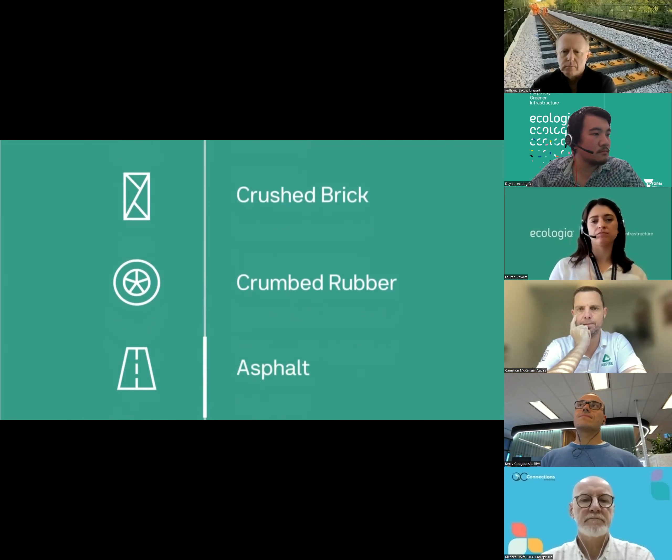The future of Victorian infrastructure is green. Recycling Victoria has laid out a 10-year roadmap to a circular economy, a future where our state's public and private sectors will unite to prioritise sustainability. At the core of this are our public assets, the roads and railroads that connect us and ignite possibilities. But where does the change to green thinking begin? The Recycled First policy. Recycled First will require transport infrastructure projects to optimise the use of Victorian recycled and reused materials. This will see the use of recycled aggregates, glass, plastic, timber, steel, ballast, crushed brick, crumb rubber and reclaimed asphalt pavement take precedence over virgin materials. For information, technical advice and support on bringing your sustainable project innovations to life, drop ecologiQ a line. Recycled First, supporting purposely greener infrastructure.

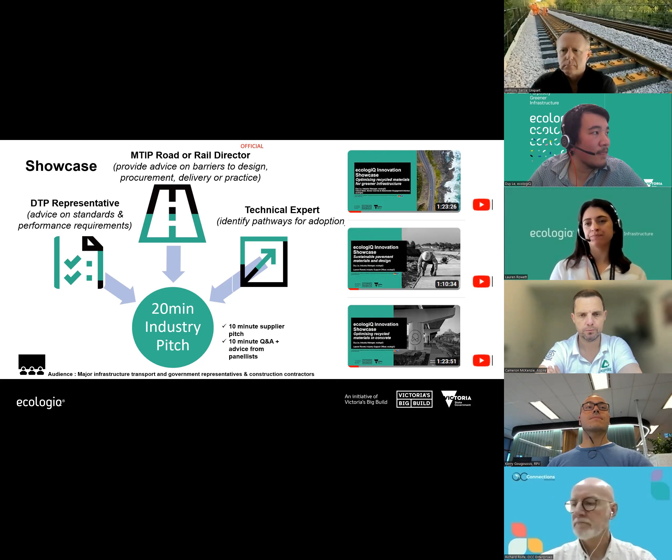So now for our panel for this round, I would ask our panelists to turn their cameras on. I'd like to introduce you first to Kerry Gougoussis, Manager Innovation Continuous Improvement, Rail Projects Victoria, our rail expert for this event. Kerry, do you want to say hello? Thanks, Doy, and happy Friday, everyone.

I'm excited to be here and see what's new on the market and how we can optimize the use of recycled materials on our rail projects. So thanks for the warm welcome, Doy.

Well, thank you, Kerry. Next, Yew Chin Koay, Structural Engineering Advisor at Major Road Projects Victoria. Hi, everyone. My name is Yew Chin Koay, Structural Engineering Advisor, and good to be here and good to listen from the industry, what they are doing for the recycled material.

Fantastic. Thanks, Yew Chin. And Irina. Hi, everyone. I'm also welcoming any new innovations and products, and look forward to hearing today from the panelists. Our role and engineering team at MRPV is really supporting and providing technical support to ecologiQ and the MRPV program in implementing this recycled first policy.

So we definitely are interested in removing any barriers, such as standards and specifications that are currently preventing either recycled products or new products from being used. And we very actively work on creating new specifications and preparing the changes that are necessary to be done.

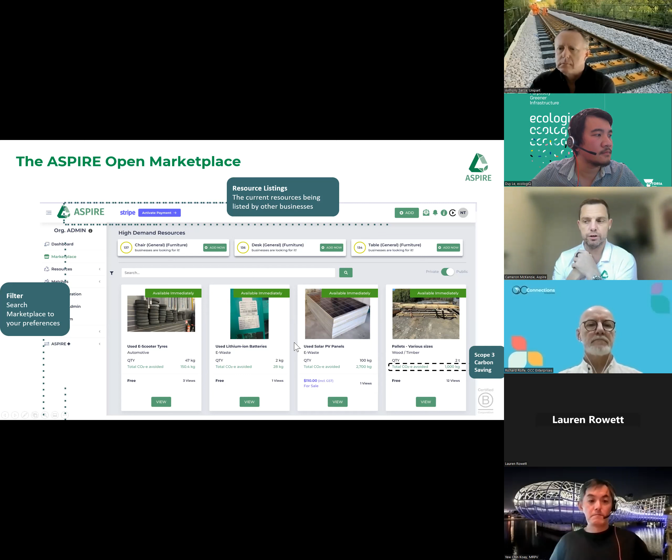So we've got them at the top, businesses or organisations that are actually looking for resources, interested in bringing it into their supply chain. And down the bottom are resources that people want to list or get rid of. The algorithm inside is not passive - it actually alerts these businesses that there's an opportunity there for them to look at.

So basically this is just a quick overview. We'll share these slides later - I'll ask Julie to do this, please. But basically what we've got here is just some high-level customizable reporting that we have. So within your network, as we just spoke about, they've got about 450 businesses in their value chain or in their network.

And basically here, what this does is it identifies the market opportunity. I was actually speaking to Infrastructure Australia yesterday about this and some of the reporting we do, and they were quite interested because they've got a lot of data and a lot of information. They know where the opportunities are, but they've got no real way to create a market around the supply and demand, where we're hoping to be working with them to do that.

And down the bottom, you can see there that we try to balance out or identify where the gaps in the markets are. So when you might have hundreds of tons of X product with no demand on it, what we try to do is help balance that supply demand aspect of the market out.

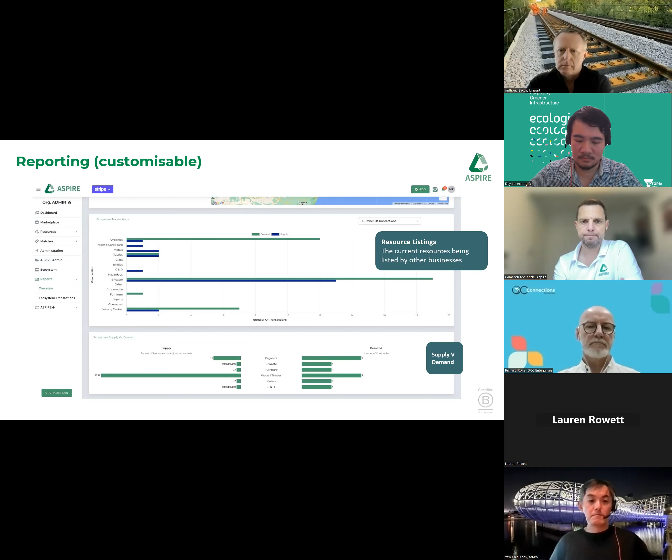One of the elements that we do at Aspire is we've got an auditing system. So as part of your ecosystem, you can go in and identify and have a look and see what the businesses are doing - again, it's very unique. And what this does is really help organisations with their actual environmental policies and goals for projects.

And what we want to do is be able to help these businesses with their sourcing, their sustainable sourcing, also listing information on the platform, so we can actually measure the impact that you're creating over the life of a project or over the life of a stage of a project.

This is just another case study I thought I'd bring in. So basically what we did is we went through this organisation - they uploaded or went through and used the platform to measure certain aspects of their business. And over, I think it was a 12-month period, it was measured over 40,000 tonnes of carbon emissions avoided, over 200,000 tonnes of resources destined for landfill, but they managed to measure and repurpose through the platform.

And for all those down there, it's over 680,000 trees equivalent of carbon reduction in the environment. So there's nothing to sneeze at - we're actually quite proud of this. But also too, this isn't just one case. We've got several organisations that do these type of numbers through the platform and really see the opportunity.

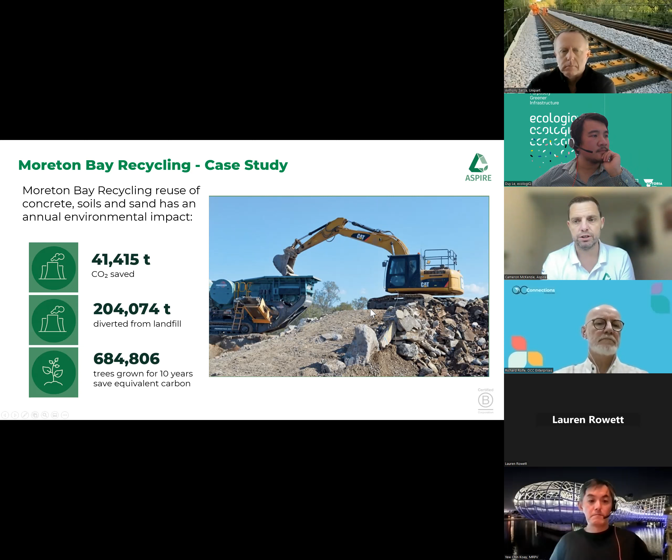We sort of touched on this earlier about the embodied carbon savings through the platform. Everything's ISO verified, but also, for those on the call, we're actually a part of Infrastructure Sustainability Council, and we're also a part of the iSupply registration.

So we've actually got, I think it's 8 credits that you can apply to some of your projects if you use Aspire, and some of them are just for trialing it or using it or trying to measure the impact of your carbon emission savings, as well as ROI and cost saving measures through using the platform. So it's almost like a no-brainer if you've got an infrastructure project going, because we can assist on that journey and with that iSupply rating.

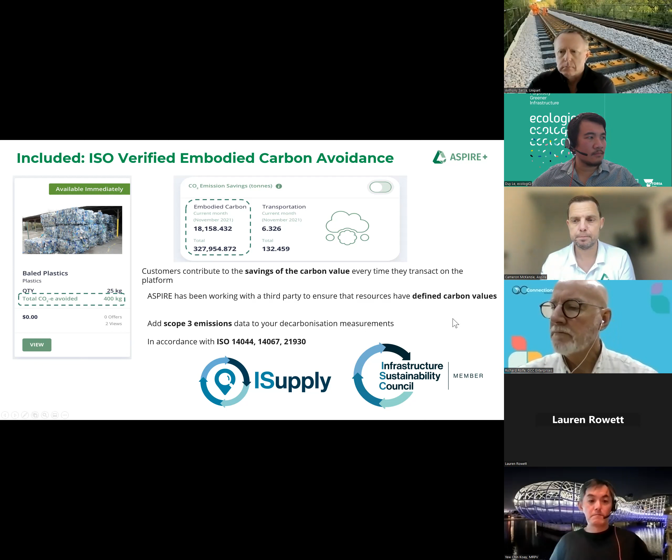Thank you, Cameron. It's great to have a presentation looking at reuse and providing a platform for that, as well as carbon accounting, which I think all of us have a role to play in on the journey towards net zero.

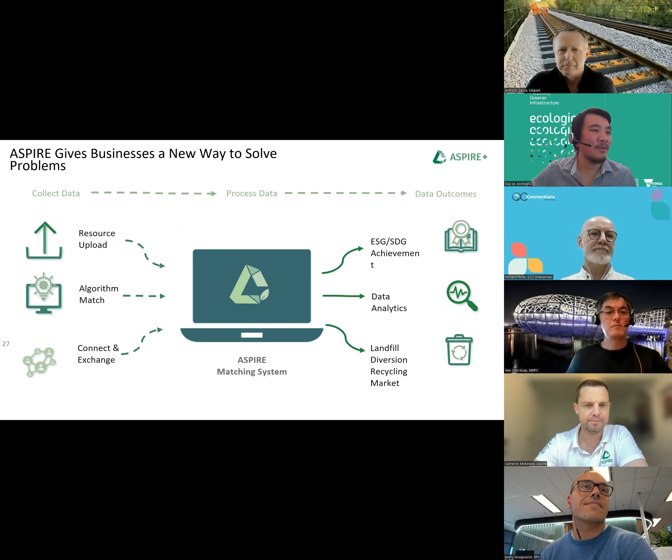Now, I think moving across to Anthony from Unipart to tell us about your composite railway sleeper. Yeah, good morning, Doy, and good morning, everybody, and thanks for the opportunity to present through ecologiQ. Much appreciated. Next slide, please. So today we're going to have a chat about the idea of using composite sleepers and bearers into the rail industry. And what do we look for in a composite sleeper or bearer that goes into that particular market?

So we're looking for something that's going to give us proven performance. We're not going to be wanting to maintain it for a very long period of time. We're looking for a consistent quality product that's going to survive the challenges of nature. We're looking at a product that's also going to be very safe in its application and also during its installation, and then also its afterlife. What do we do after it's served its useful purpose?

And part of what we're looking for, of course, is a sustainable solution. We don't want to be generating excessive waste, and we want to close that gap or close the loop on that circular economy. And what we look at is the whole life cycle cost of composites in the rail industry. Next slide, please.

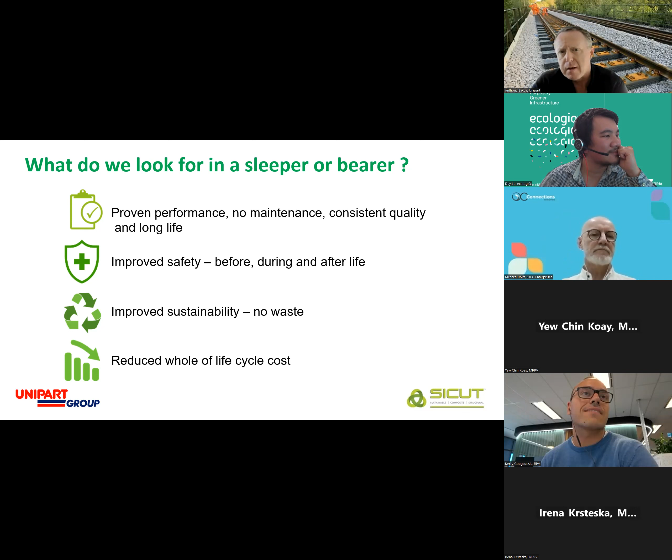So the product that we offer has some fairly unique properties in that it has the same density as hardwood timber. So it feels and handles, cuts, drills, and it's installed exactly like you would with timber. It doesn't rot, it doesn't split, warp, or degrade over time.

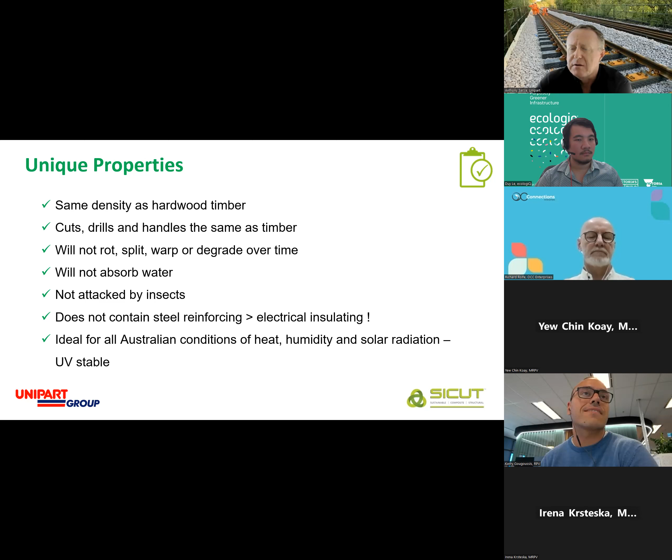It doesn't absorb any moisture. It's not attacked by any insects, and it doesn't contain any steel reinforcing, which can pose issues when it comes to electrical insulation across rails when it's used in the rail industry. And it's ideally suited for Australian conditions and extremes of heat and humidity and solar radiation in fairly northern parts of this country.

So the Sicut composite sleeper is made from 99.9% recycled feed. So we don't use any virgin material in the production of our sleepers and bearers. And it's the highest percentage that, to our knowledge, in the industry by far.

So essentially what we use, our main feed is HDPE, as I mentioned, and it's those bottles that you see in that image there. And we certainly don't use any agricultural waste. We don't use industrial waste. We don't use thin film plastics or polystyrene, no landfill material, and we don't use any plant-based fibre material inside the composite product that we produce.

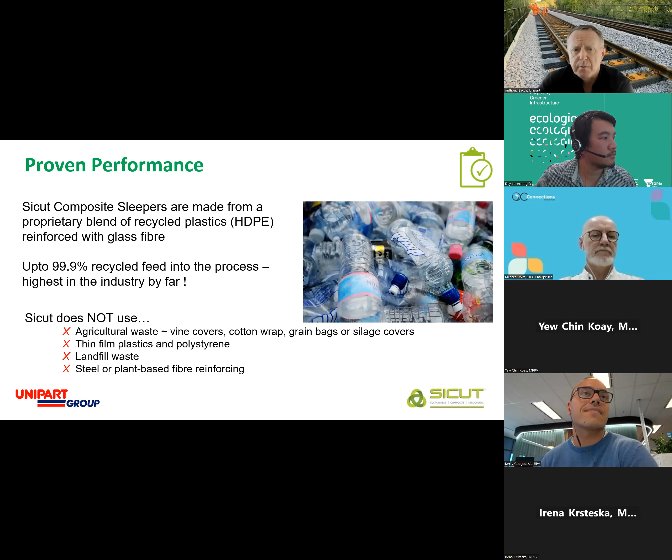It's widely used across the world in over 20 countries, predominantly North America, Europe, Middle East, and also now slowly into Australia. They're manufactured in 2 sites, UK and the US, and we are looking for 2 manufacturing sites here in Australia as well. But I'll make the fact that we do produce this on a full-scale commercial basis.

So these are not prototypes, these are not R&D exercises. To date, we've produced in excess of 300,000 railway sleepers. That's a lot of material and a lot of track and a lot of kilometres.

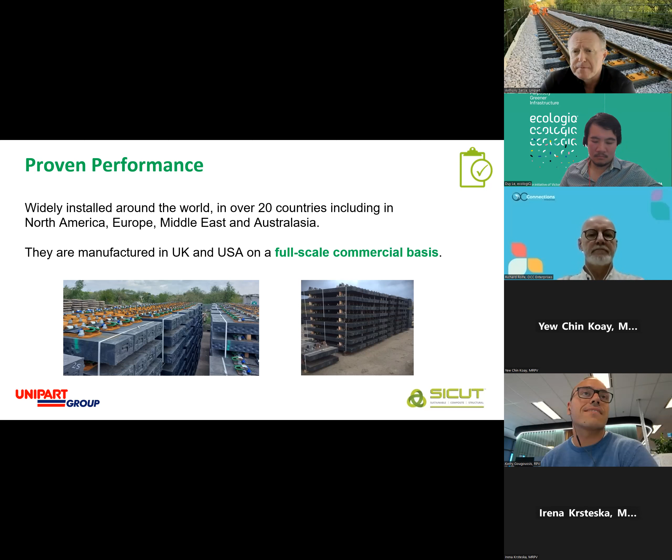So they're designed for extreme conditions and reliability and approved to the European, ISO, Australian and US standards. The standard numbers there that are listed, but the most predominant one we see in Australia is the AS 1085.22 and complies to all those standards that I've noted on the slide there.

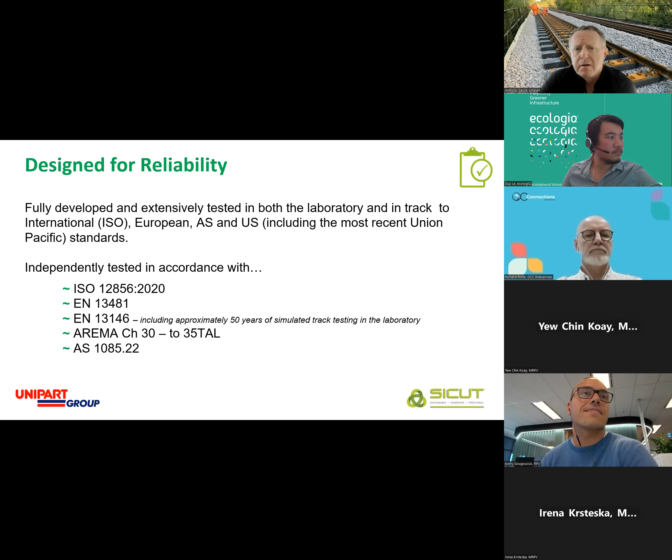We are the main supplier of choice into the European market, predominantly through Network Rail, Deutsche Bahn, and also the Swedish rail networks. They don't use any other material. They don't use concrete, they don't use timber. They use exclusively our material.

We've also been granted an interoperability certificate across the European networks, which allows us to provide the material across the entire European rail community. And it's been certified for use across the heavy haul network through Europe with a 30-tonne axle load rating for those applications.

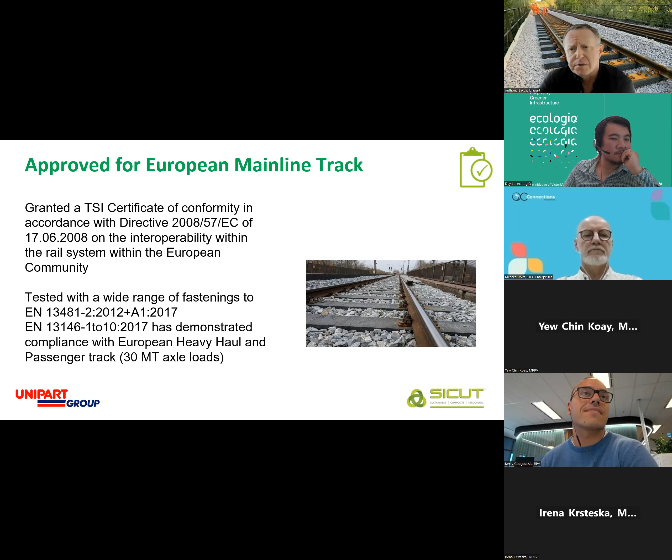Having a look a little bit closer to home, they've been installed in Australia. Probably one of our most recent one is BlueScope Steel down in Port Kembla. It's a very quick, simple installation. They use conventional tooling as they would doing a turnout refurb using conventional tools in terms of drilling, cutting and material handling of those bearers on this turnout.

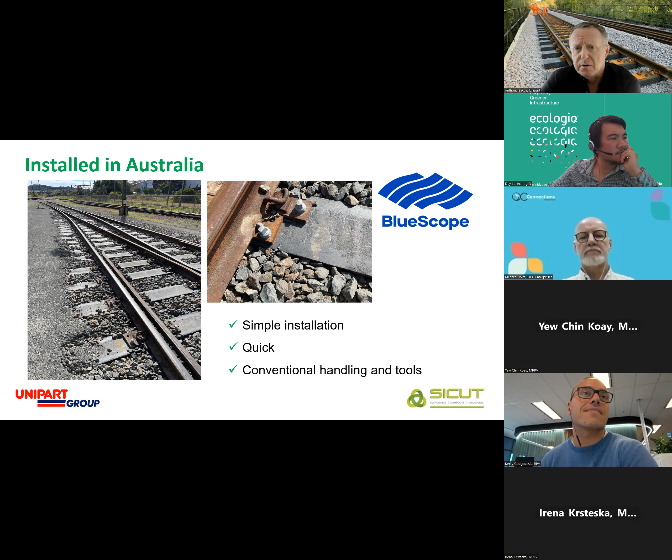We have a fairly high continual traffic load here. This is a shunting yard where they marshal up the coils of steel that have been produced, a constant 25-tonne axle load across these turnouts, replacing timber that lasts on average sort of 3 to 5 years. We're looking at a life of in excess of 50 years.

Also installed at Tasrail at a place called Western Junction outside of Launceston for the last 3 years on 3 turnouts. No degradation or breakdown whatsoever in that application.

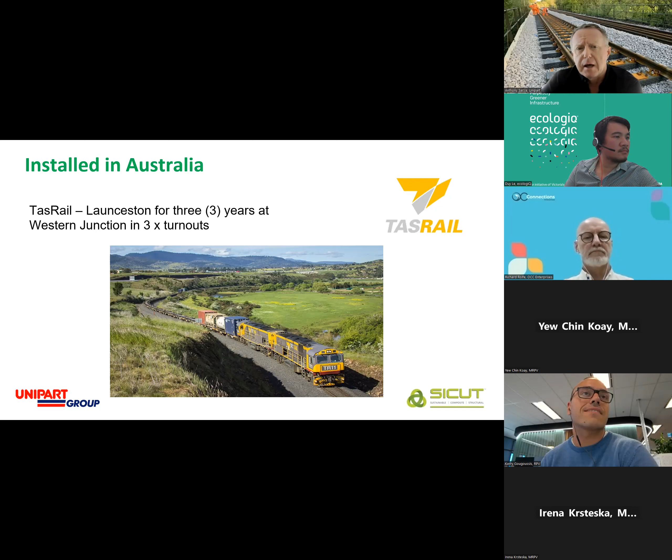Also installed at Pacific National up in Lithgow, in the Blue Mountains, on a shunting marshalling yard. Again, we've seen no degradation or breakdown in that material whatsoever.

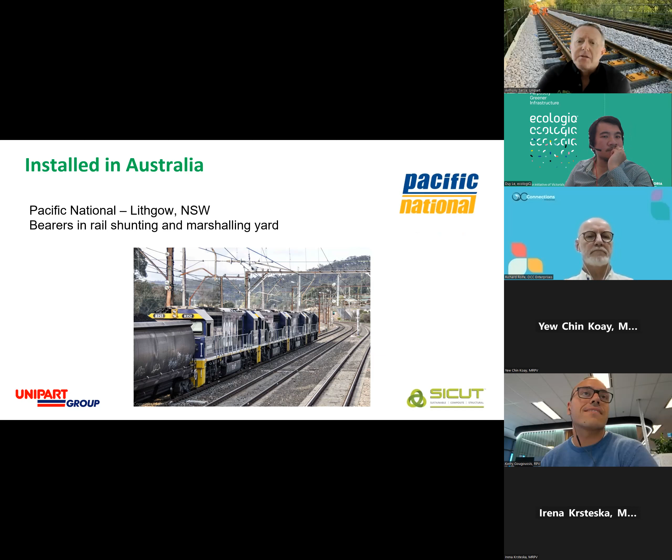We're about to go into a trial program with the PTA in Perth. We'll be installing a series of composite sleepers in comparison to timber, predominantly at Claisebrook Station, which is a suburban rail station in Perth in the metro area.

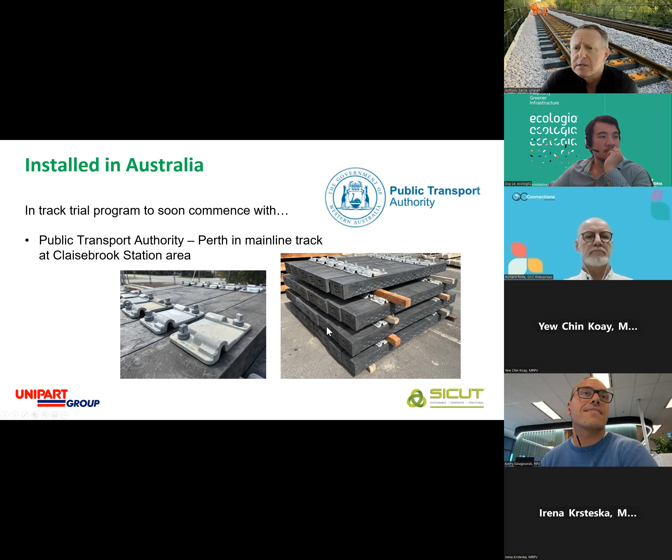And then also, again, another trial program associated with a type approval process through Queensland Rail at a location yet to be determined.

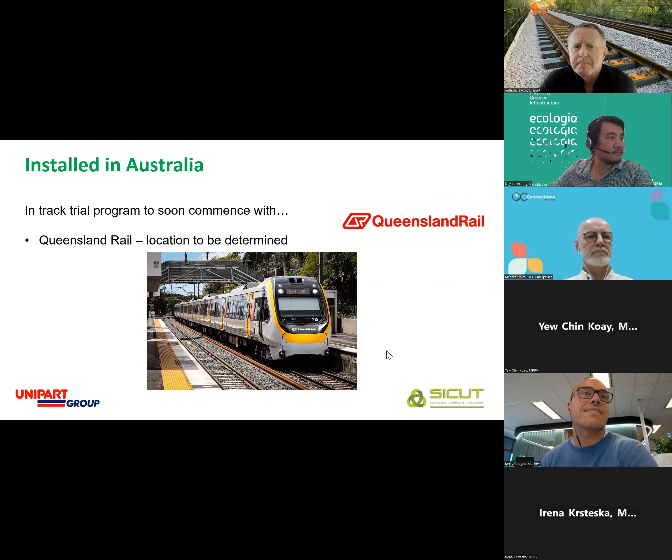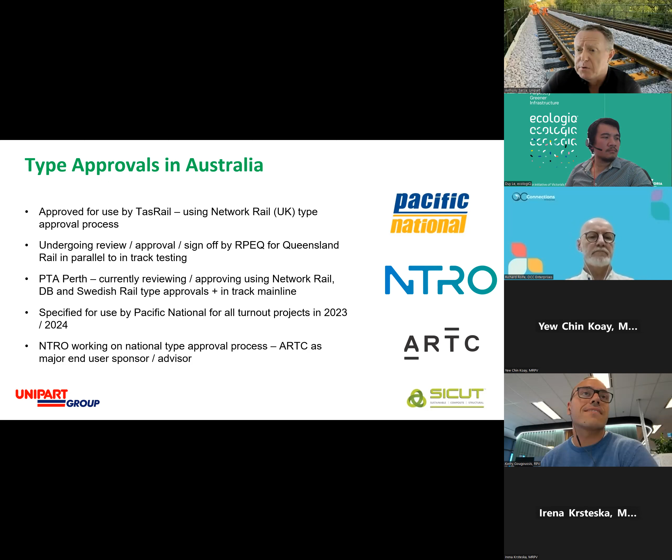For the type approval process, we're in various parallel stages across the country. We're going through a series of approvals through Tasrail, using the Network Rail type approval. We're in the process of an RPEQ sign-off for QR. The PTA in Perth is also looking at using the grandfather principles for Network Rail, Deutsche Bahn and Swedish Rail for their approvals. It's been specified for use by Pacific National, and we're also working through the NTRO for a national type approval process with ARTC as principal sponsor, moving forward in the latter part of this year and early next year.

Material handling, as I mentioned earlier, is exactly the same using mechanical and manual equipment. You can use the same sleeper and bearer handling, both mechanized and manual. No additional tooling or handling equipment is required at all.

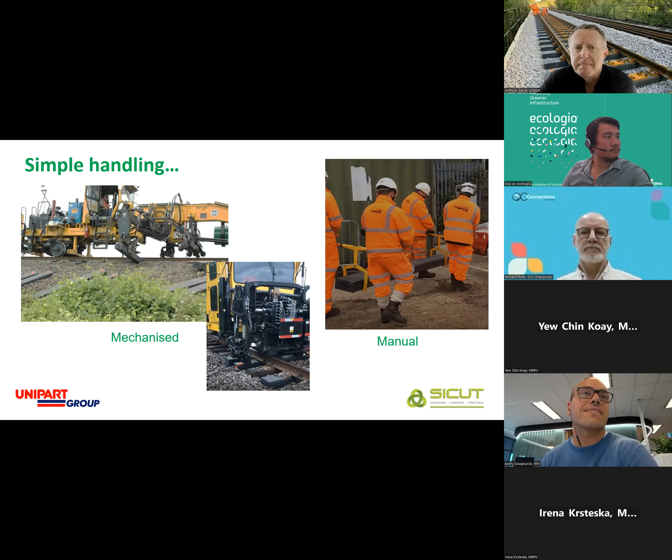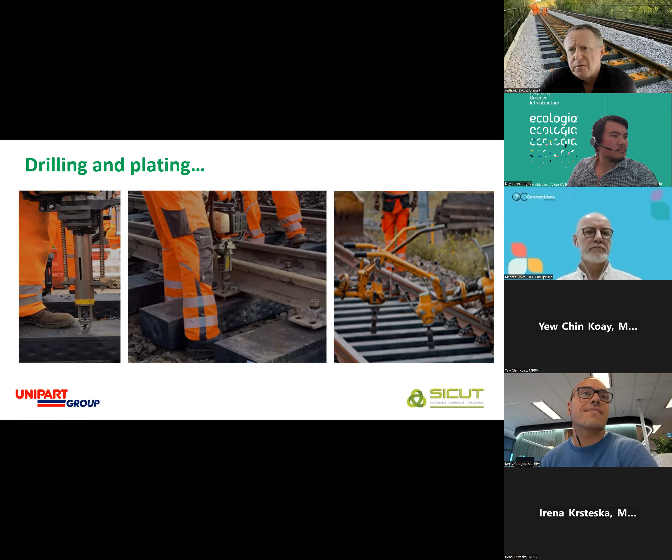It drills and plates exactly the same way as timber. You use the same drilling and cutting methodology. There are no issues or dramas with how you would handle this material.

Rail welding and grinding, again, nothing really to be cautious about. The material doesn't self-combust or catch fire. You have the same precautions as you would working with concrete or timber when working with our composite.

Our material is 100% recyclable at the end of its 50-year life. It doesn't contain any plant-based fibres and no steel reinforcing whatsoever. So there's no liability at end of life to go through a complex and costly disposal process to remove inserted materials. The ultimate plan for us is to pick it up and put it back into the front end of the process, recycling it into another composite bearer or sleeper.

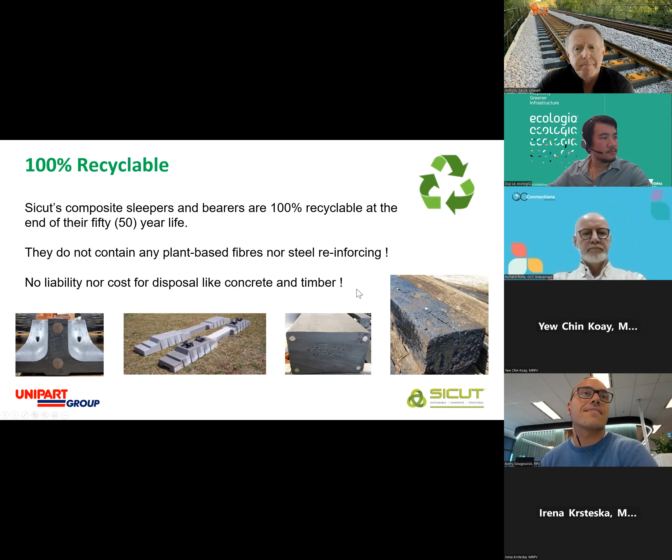It is also resistant to derailment damage or wheel drop. Quite often when you get a derailment, you'll end up having to replace all the sleepers or bearers damaged by the wheels striking them. You will indent the composite, but you will not crack it or break it as you would with concrete or timber.

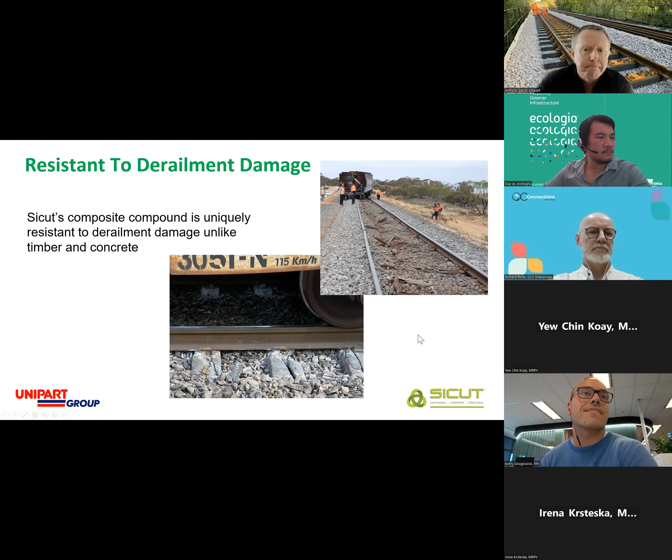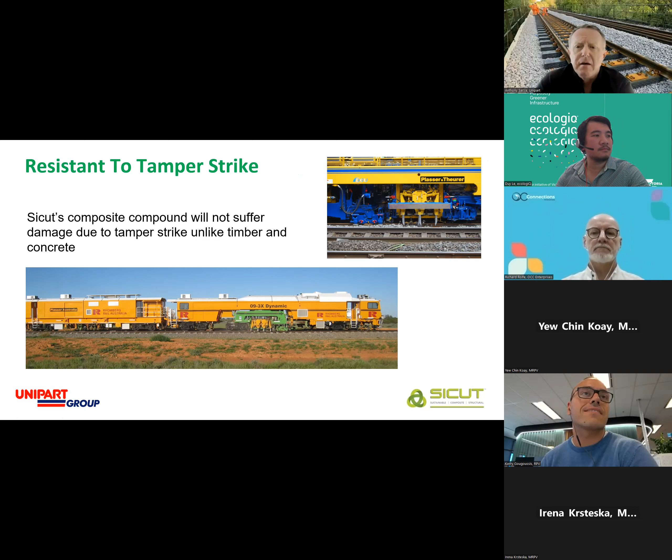It is also resistant to tamper strike. The tamping process locks and positions the ballast tightly underneath the sleeper or bearer. Occasionally you'll get a tamper strike on one of those sleepers or bearers that damages it and requires replacement. Again, you will dent it slightly, but you will certainly not need to replace it.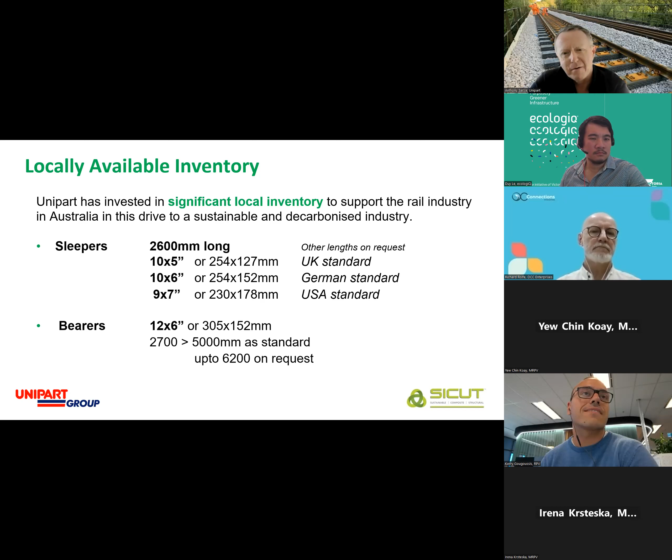We have significant local inventory, depending on your gauge of network, available in Australia. We have hundreds of these and we are importing them continuously out of Europe at present.

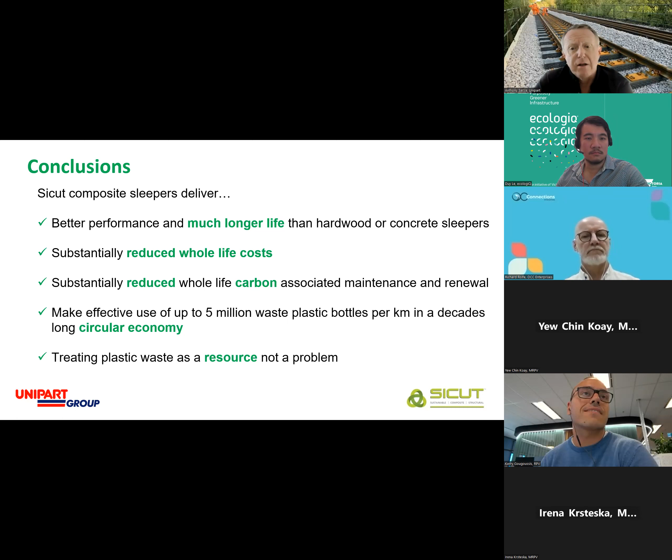Looking at our composite sleepers and bearers, we have a significantly longer life than hardwood and concrete, at 50 years. We're able to look at the whole of life cycle costs, and over a 50-year life cycle it's considerably lower than concrete and certainly less than timber. We have a lot of embedded carbon reduction using composites versus concrete or timber, with concrete being the 4th largest emitter of CO2 today. We're looking for ways to reduce that moving forward into the future. We use about 5 million plastic water bottles per kilometre of track converted into composite sleepers and bearers. We certainly see plastic waste as a resource, not a pollution or waste issue.

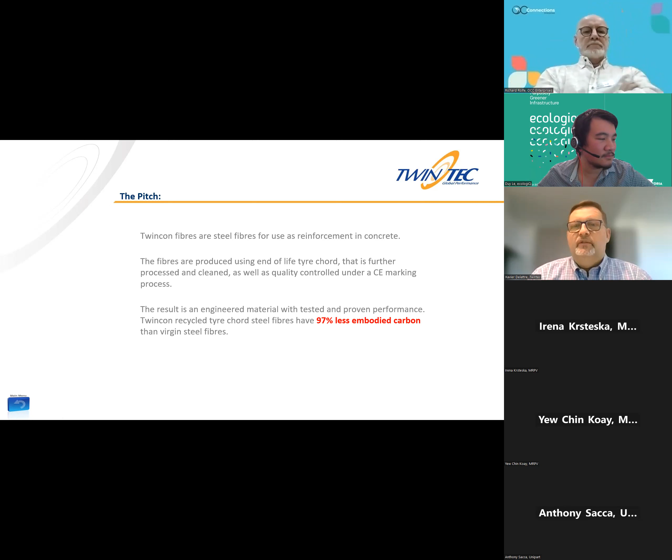So what is Twincon fibers? Twincon is a steel fiber sourced from end-of-life truck tires, which is then further processed and cleaned. We also have a patented quality control system under the CE marking system, and the end result is an engineered material with tested and proven performance. The Twincon recycled steel fibers have 97% less embodied carbon than a virgin steel fiber, which we also sell, by the way.

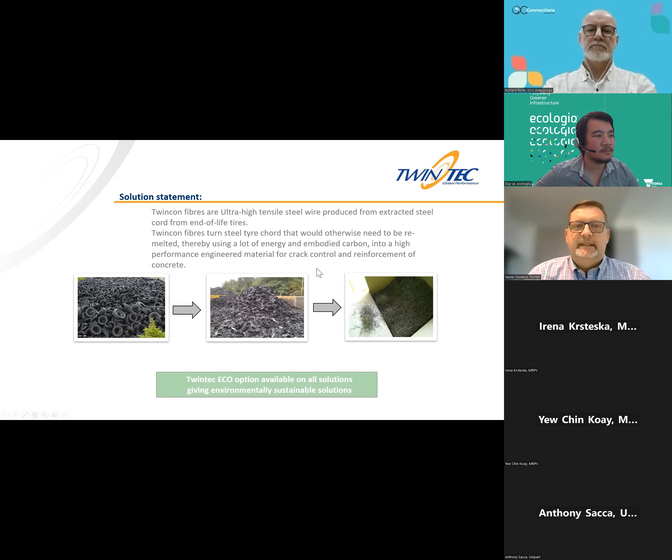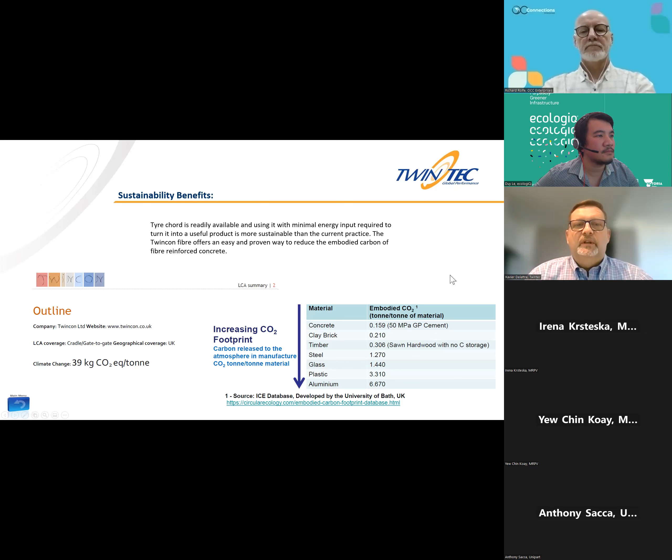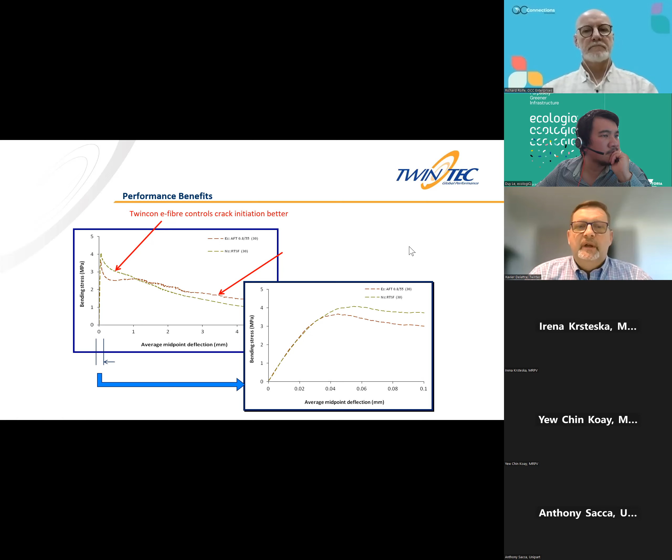This is the technical slide. You can see on this graph, bending stress versus midpoint deflection, similar to an EN 14651 residual flexural tensile strength test we do with any fiber reinforced concrete. The top green line is the Twincon fibers, showing that the limit of proportionality, the force required to crack the concrete in the first instance, is much higher than with a normal virgin steel fiber. As we go further along in deflection and crack opening, the performance is also much higher using Twincon fibers. So these fibers are not only much lower in embodied carbon, they're also much higher performance than a virgin steel fiber.

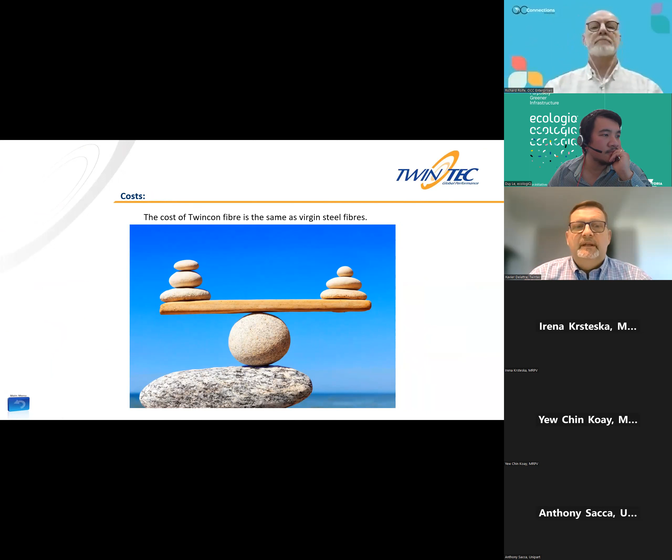In terms of cost, basically the market sell price of these Twincon fibers as an engineered material is exactly the same as for a virgin steel fiber, so there's no problem in terms of cost.

In terms of barriers to entry, there's a few we're finding at the moment. The main one is that they're not covered by existing specifications or standards, because it's not a product that's been around long enough. If you look at all the steel fiber specifications used at the moment, they're all based on existing hook-end steel fibers, which we also sell and which are approved to these specifications. But these fibers, being a different shape, size, and diameter, are not included in the existing specifications. So we'd have to either get them included in existing specifications or write a new specification especially for this type of recycled steel fiber.

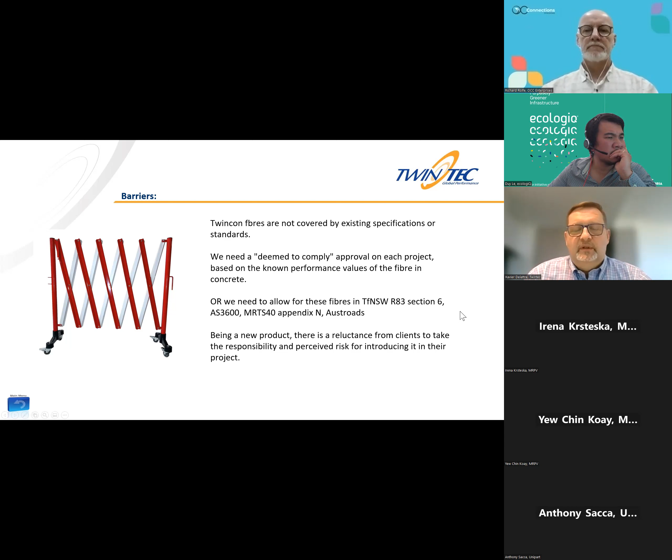Being a new product, there's also obvious reluctance from clients to use it because they've never used it before, which is a perceived risk. But having said that, it has been used in Europe quite extensively, and we'll cover that in the next slide.

In terms of constructability, how do we use these fibers? Because they're very thin and a bit shorter than a normal virgin steel fiber, we've developed a special integration machine - a rotating drum which breaks up the fibers as they come out of the box, then uses an air blower to blow the fibers into the concrete mixer truck or plant directly. That ensures the fibers are well distributed within the concrete, there are no balling issues, and the concrete mix is homogeneous.

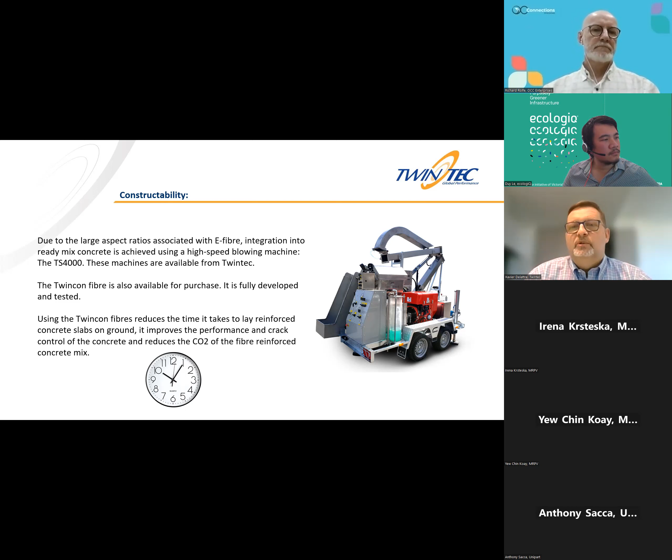These machines can be purchased from Twintec, so there's no real issue there. The concrete plant or contractor would buy one or hire one from us. The advantage in terms of constructability is that construction time is much quicker using fiber concrete compared to traditional reinforcement or mesh. The performance, in terms of crack control especially, is much higher, and the embodied carbon is reduced.

In terms of applications, Twintec Group in Europe is an industrial flooring contractor, so the main uses for this fiber to date have been in industrial flooring. We've completed quite a few projects in Europe, including this one shown here, using a blend of Twincon recycled fibers and virgin steel fibers to get the crack control performance at the LOP FR1, but also the higher performance at the ultimate design limit state.

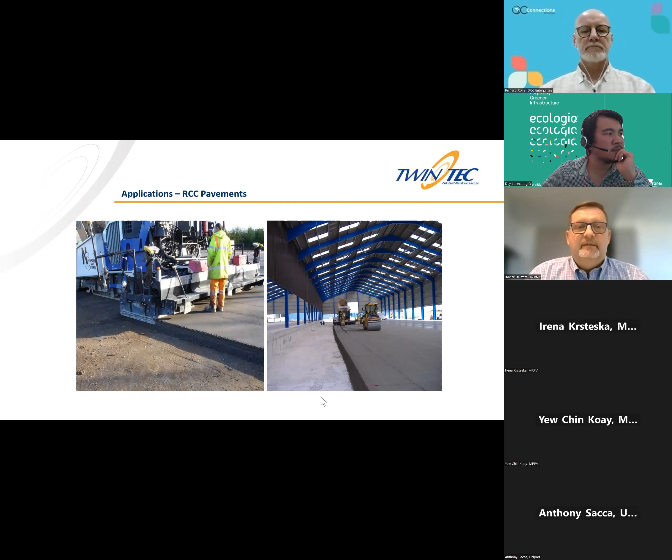Another application which would be particularly relevant today is that we've also done trials and testing for roller compacted concrete pavements with the Twincon fibers included in the mix, to enhance the performance of the roller compacted concrete, especially in terms of bending and ductility. The trials we've done in Europe have been very successful, so we would like to trial this type of technology here in Australia.

You can also use the recycled Twincon fibers in shotcrete. They reduce the rebound by up to 20%, lower the embodied carbon of the shotcrete mix, and enhance performance. So it's good all around.

Precast is also a very good application for these fibers. They really enhance the performance of the precast. You use them the same as you would virgin fibers, but with a reduction in embodied carbon. We've done many trials in Europe with various precasters, and we're doing trials here in Australia next week with a large precaster. So I would invite other precasters, if you're interested in lowering the embodied carbon of your products, to have a try.

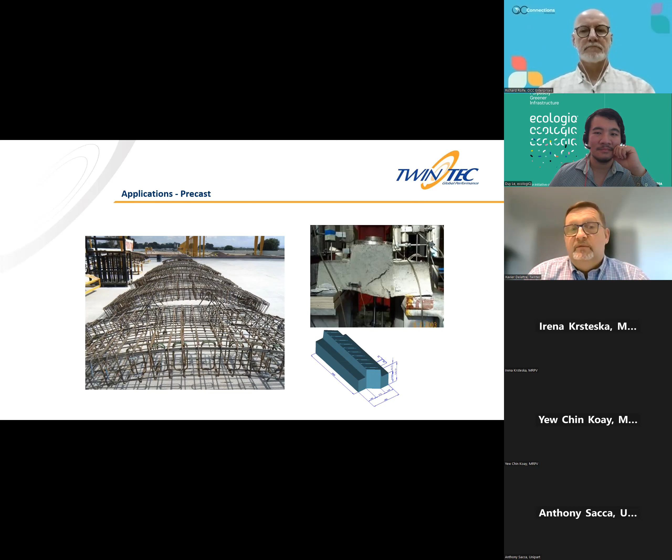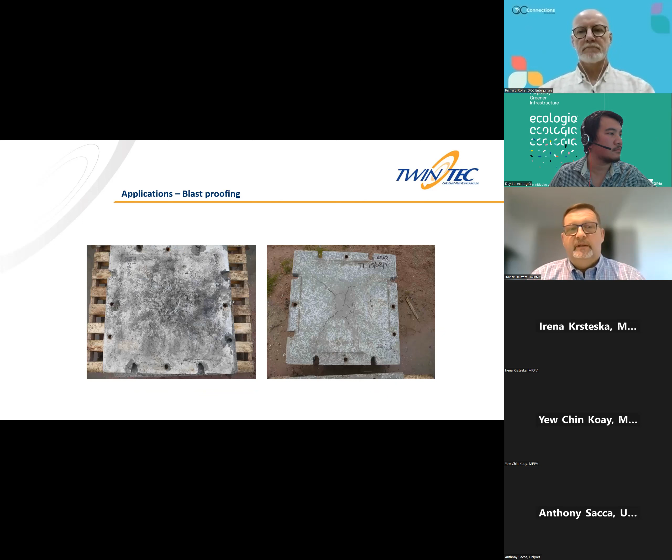Blast proofing is probably a very niche market, but that's where fiber concrete really was born in the USA, especially in the 50s and 60s with military type uses. So if anyone's working on concrete that requires blast proofing, these fibers really help, as you can see from the test panels here.

In summary, these recycled steel fibers are very high strength, very high quality steel. It would be a shame to just send them off to India to get remelted into a new metal product, which is currently what's happening. By using them at the source, cleaning them up, and going through our process and quality control, you're avoiding a lot of carbon being used in transporting this scrap overseas to be remelted and then transported again to the end user somewhere around the world.

Very high performance, especially when blended with virgin steel fibers in some applications, but also used on their own. They've been tested in accordance with the latest design guidance, especially EN 14889 and 14651, which are the existing standards for virgin steel fibers anyway. And there are significant environmental benefits because of the lower carbon.

And also, as has been previously stated in other solutions today, this is not a research project. This is a tried and tested product which is commercially available. We produce between 200 and 2,000 tons per month, depending on demand, and we've used it on quite a few projects already. So I'm not asking for someone to help us with research - we've spent 5 million euros and 20 years researching and testing this product in concrete. It's a ready to go solution. Thank you.

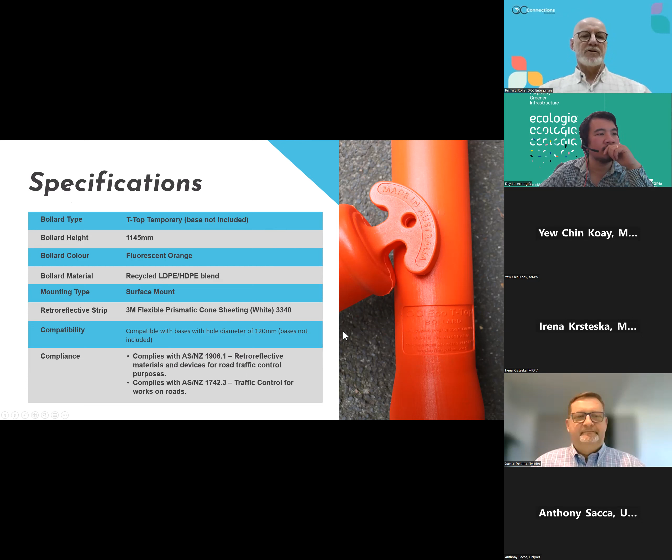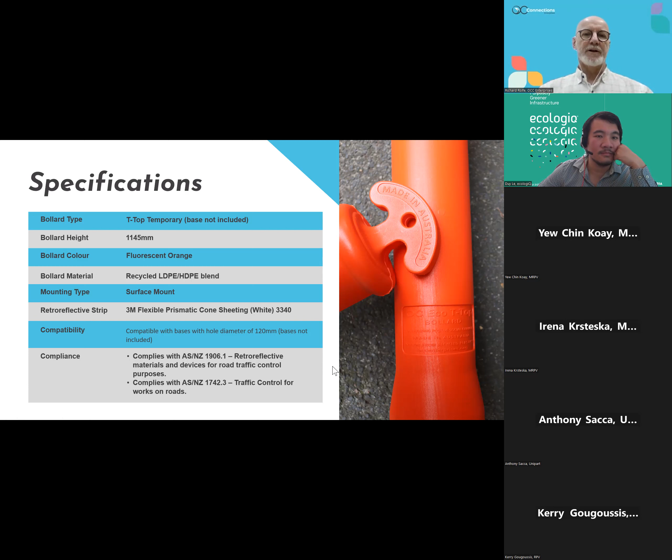The next slide, if you wouldn't mind. So the specs, these are a standard product, very similar to every other bollard out in the market. But as I say, they do outperform, particularly in terms of their lifespan, our resource recovery process. We launched this product back in November 2022. We've put in excess of 22,000 bollards into the market, and to date, probably less than 100 of those have come back after 12 months in the market, through our resource recovery program. So they are performing particularly well, certainly a lot better than a lot of the other end-of-life bollards that we've received. So that's our story, and thanks again for your attention and your time.

Happy to take questions.

Thank you, Richard, and great to hear an example of the circular economy having not just the environmental and the economic, but really those social impacts as well.

I'm not too sure who to kick off with. Kerry, I think you put your hand up first. Sorry. Thanks, Duy. Yeah, it was a bit of a race.

No, Richard, wonderful. That's great to see. I mean, we've seen this sort of thing before, I guess, with the recycled plastic in this application. I guess what's sort of stopping us from adopting this sort of solution?

Primarily awareness, I think, Kerry. We have been working very hard to make organisations, the procurement departments amongst those organisations, aware of the product. Certainly there's no barriers in terms of regulation, no barriers in terms of the commercial viability of the product. As I say, we're very competitively priced. It's really just awareness, and through the administrative processes of the various organisations, making sure that the people who are aware of the product, typically in the sustainability parts of the organisation, are communicating with the procurement teams to lock us into that supply chain.